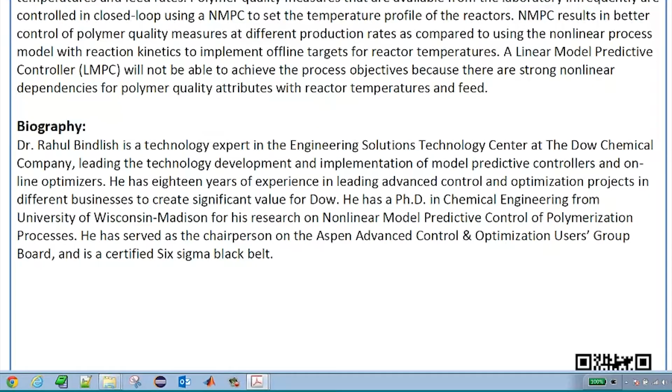He's also served as the chairperson on the Aspen Advanced Control Optimization Users Group Board and is certified Six Sigma Black Belt. Okay, so that's an overview of Rahul, and I'll go ahead and just turn it over.

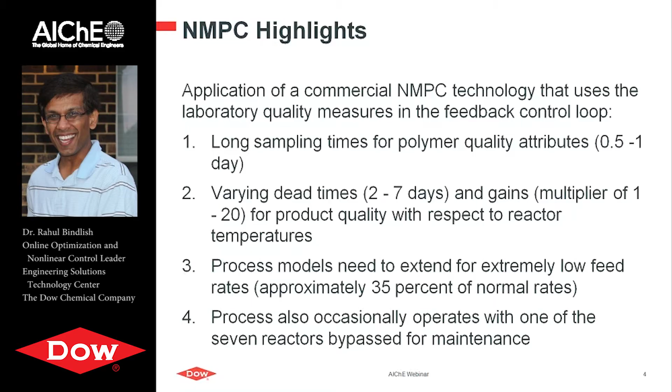So in short, especially the last 2 bullet items, they signify some of the things that happen in real life. In an industrial case, we build a controller, and what I've realized in my career is whenever we implement anything, things always change because we cannot predict the future. But the nice thing with this technology is it allows us to still realize value.

So I talked about significant nonlinearities. There are significant nonlinearities in dead time, gains, settling time. So it cannot be controlled using a linear MPC. We verified that. We did a technology assessment and realized that this problem needed a nonlinear controller. So this graphic just shows the extent of nonlinearities a little bit.

On the y-axis, you've got scaled viscosity, which is a polymer quality attribute. It's scaled, so you don't get to see the real numbers. Then the horizontal lines are the spec limits. What I'm showing here, the blue line, is the variation in viscosity if the feed rate was to increase 10% from where it is. So it has a dead time of about 200 hours or so, and then it dips down. And if you didn't do anything, it would basically go below the lower spec limit.

So it shows how the dead time is changing depending on the feed rates for a 10% feed rate change. And the gains are changing too. It's just a simple graphic that tries to highlight the problem. The one thing to notice here is the dead time and the settling time. The dead time is like 200 hours, it could be 100 hours, so you don't see anything happening in the process. So the models have to be accurate. They need to capture the nonlinearities, otherwise you're going to have significant spec issues.

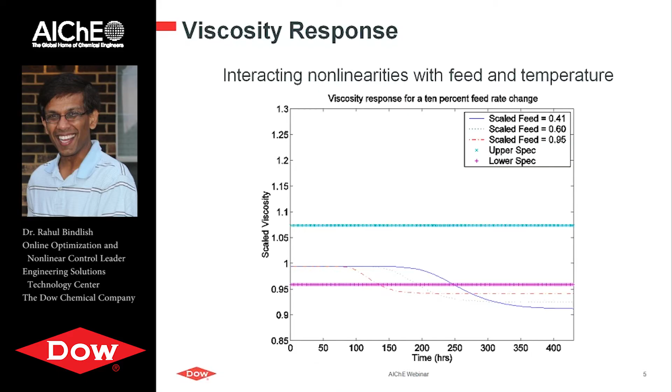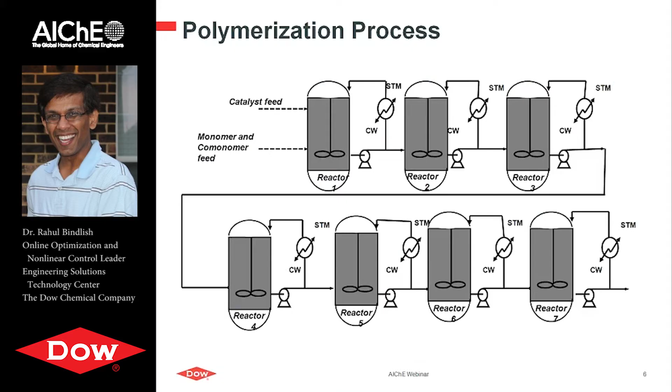All right. When we are in grad school, and a lot of you are in academia, I myself was in grad school at University of Wisconsin and did my thesis in this area, you have all the flexibility. You can build your controller or write your equations in whatever format. You can write Fortran code, MATLAB code, and make a theoretical advance.

But there are different challenges in an industrial setting. We have to use a commercially sustainable solution. It should have the appropriate interface, and the solution should be able to migrate to new operating systems and such. In this case, we are using Aspen nonlinear controller based on bounded derivative neural network models. There are a couple of papers in the literature, Turner and Guiver and Naidu et al., that outline the mathematics behind it.

For this process, we did have a kinetic model in Fortran that had been used by the business for a long period of time for process development and validation. So we used that kinetic model and did lots of simulation cases to construct our BDN models. In this case, we ended up choosing 50,000 cases to cover the operating region of interest.

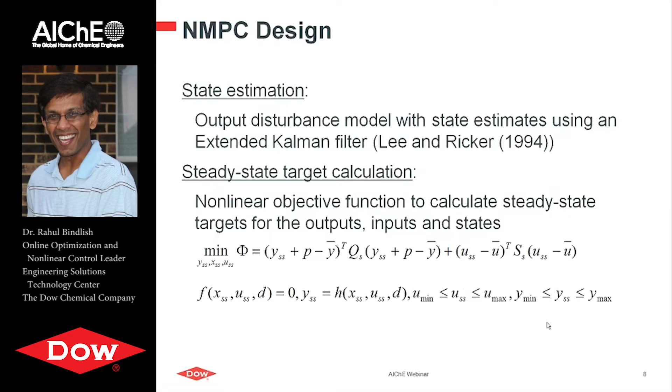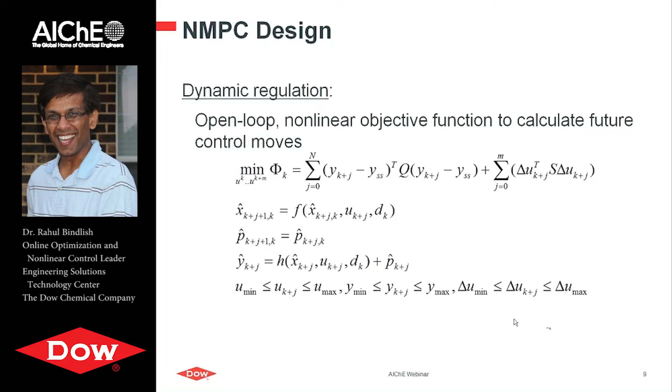Okay. So a natural question that should arise in anybody's mind would be, if the process is so nonlinear, before you implemented nonlinear MPC, what was going on at the plant? There was no linear controller, so what was going on, right? So in some ways, some would even classify it as a nonlinear controller was already running. So let me talk about what was going on at the plant.

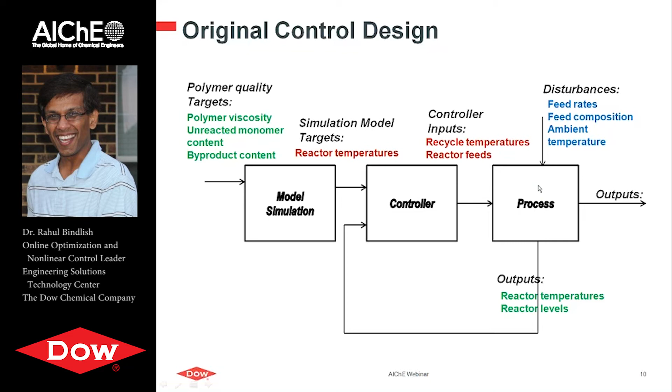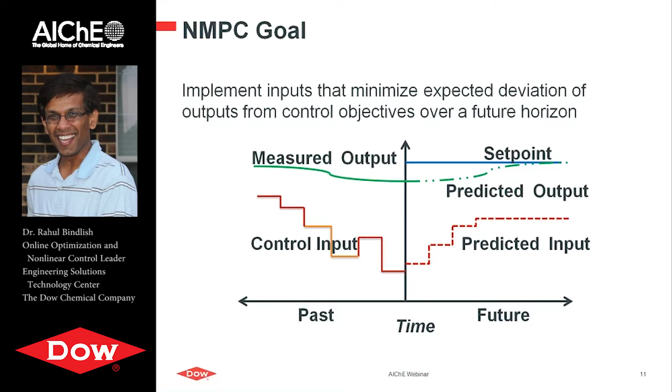The polymer spec limits, they're very important. The polymer viscosity target in this case is the next important limit. Then we also have limits for reactor temperature differences. What those limits are doing is essentially we don't want to heat up in the first reactor and then cool in the second reactor and then heat up again in the third reactor. We want to avoid having that kind of zigzag profile if we can. So we have something called reactor temperature difference CVs that allow us to achieve that.

We ended up adding another controller objective recently. It's been about a year or so, and that's to minimize the byproduct content. This was something we didn't have in the initial controller design. We didn't even have a lab measure for it. But based on the success of this controller, we ended up adding a lab measure for it and also added it as a controlled variable. It gives us better economics when we are able to minimize byproduct content.

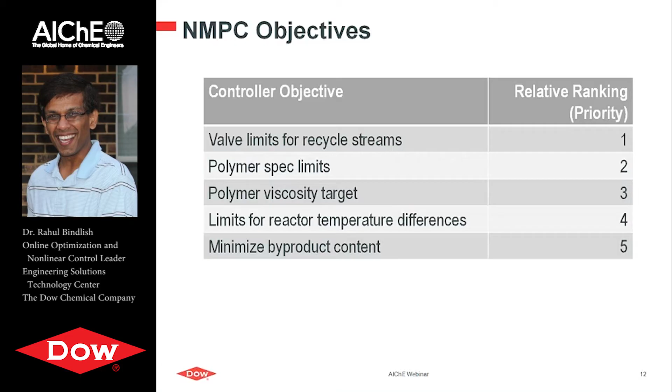So the nonlinear control design in this case, we have a cascade nonlinear control design. The very first question that would arise in a lot of your minds would be, why a cascade nonlinear controller? Why not put it all together? Couple of reasons. One of the main reasons is the computational need. If you put everything together in one controller, it's going to be very hard to realize it computationally in real time to achieve the objectives that we want to achieve. So we needed to break it for that reason.

So let me talk a little bit about that, and also the linearities and nonlinearities where they belong. So I'll mention all that. The reactor temperatures themselves, with the disturbances coming to the plant, have a settling time with respect to recycle temperatures and reactor feed that may be anywhere from 3 to 6 hours, depending on rates and process conditions. We need faster disturbance rejection and the ability to maintain reactor temperatures. So that controller is running every minute.

The models for that controller, the secondary MPC, are more or less close to linear. And that's the reason in the past we were able to achieve those objectives even in the DCS, even without using a linear model predictive controller. But with a linear model predictive controller, we are doing better than what we were doing with the DCS-based scheme.

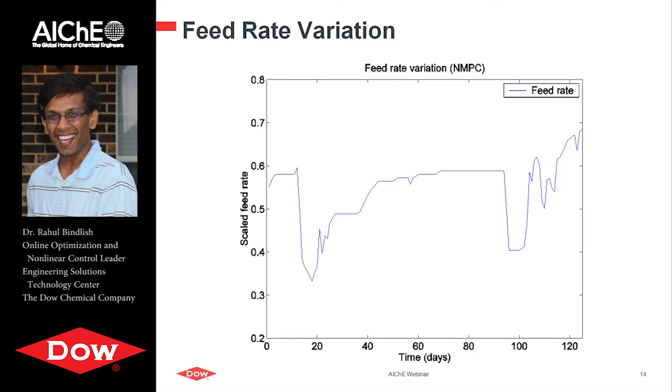So that baseline was collected for the case when the nonlinear model was running continually and was suggesting the profile to the plant, and the reactor temperature profile was the only thing that was in closed loop, not the quality attributes. But the nonlinear model itself was running continually, and that profile was fine-tuned manually.

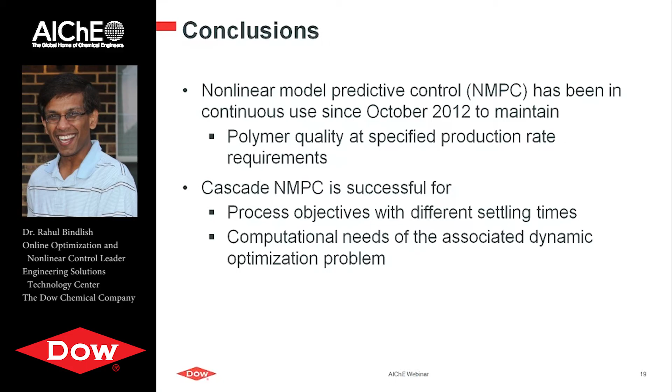Okay, great. Another question: why does the process need to have a secondary MPC controller? Good question. In the past, we were controlling the reactor temperatures and levels using DCS control. But with an MPC controller, we are able to control the reactor temperatures and levels a little better, using recycle temperatures and all the intermediate reactor feeds to maintain all the reactor temperatures and levels simultaneously. We are able to take advantage of the multivariable interactions instead of single input, single output pairing in a DCS.

Great. Another question just came in: what processes are included in the model other than kinetics and heat transfer? Are the kinetic parameters estimated? In this case, the nice thing was the business and technology people had already been using this model to develop their process and had validated it with plant data. So they had the validated kinetic parameters, and we didn't have to estimate them.

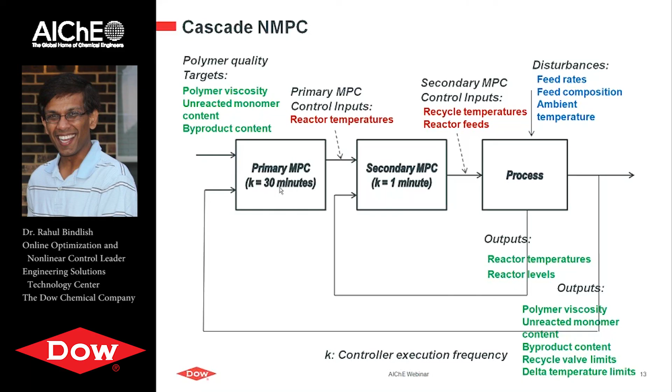Great. Could you go to the slide where you showed the before and after with the product quality limits? The distribution. Okay, so the question related to this: is there a limit or band for the control outputs before the NMPC performs a control action? So let me make sure I understand the question. So the limit for what? So the question is, does the controller only act when it predicts it's going to go outside of this deadband, or is it always trying to drive to a center line value?

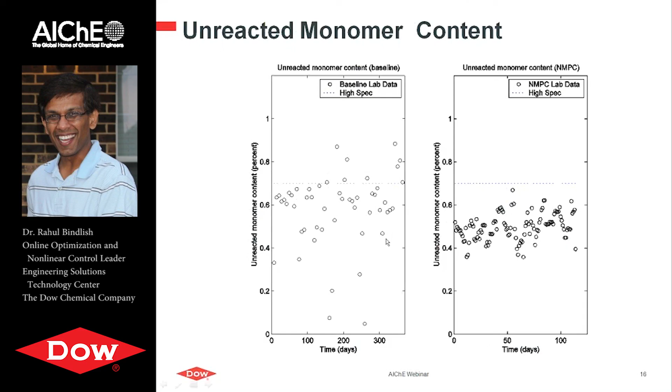Okay, good question. I guess this doesn't really show it very clearly. The polymer viscosity, we are controlling it to a target. That's the only polymer quality attribute we're controlling to a target. The unreacted monomer content, we are not controlling to a target; we're just trying to make sure it does not have an excursion. And the byproduct content, we are always trying to minimize it. The polymer viscosity, we're controlling to a target. I didn't show it here, it's really in the middle here. We also have the spec limits that are very important, but there is value in controlling it to a target, so we are controlling it to a target.

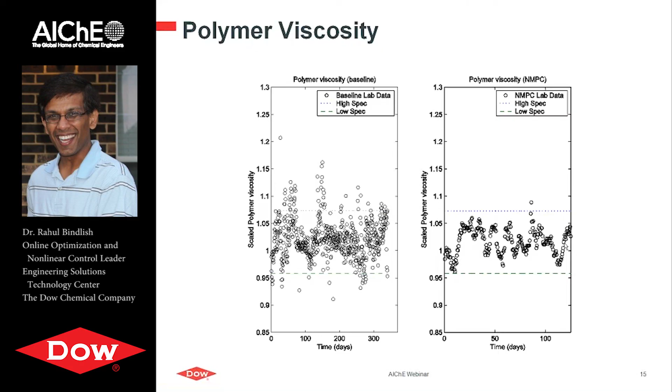Great. Okay, so we have a question about your first principles models. You said that you at Dow had these validated models, and the question is, what would be an advantage of using a first principles model versus a state space model or empirical models, and any challenges that would arise in splitting the controller into two with a first principles and possibly linear or empirical model?

Okay, I'll try to answer. I think I understand what this individual is getting at. So we have the first principles model, and for some of the finishing and mixing areas, we may have some empirical representations, and those are adequate and have the appropriate physical insight. That's what we call our fundamental model: first principles with kinetics, and also some empirical representation that captures the mixing and the finishing area.

Now the question is the advantage or challenges compared to using a BDN model. We needed to use a BDN framework because we wanted a commercial control solution in the plant that's sustainable. The challenge was to ensure that the BDN extrapolated well without creating instabilities. We examined the model predictions, the first derivatives of the manipulated variables against the polymer quality attributes, and examined them for monotonicity and made sure they made sense. Otherwise, we would have problems. With the first principles model, we wouldn't have to do that, but we didn't have the luxury of using it directly.